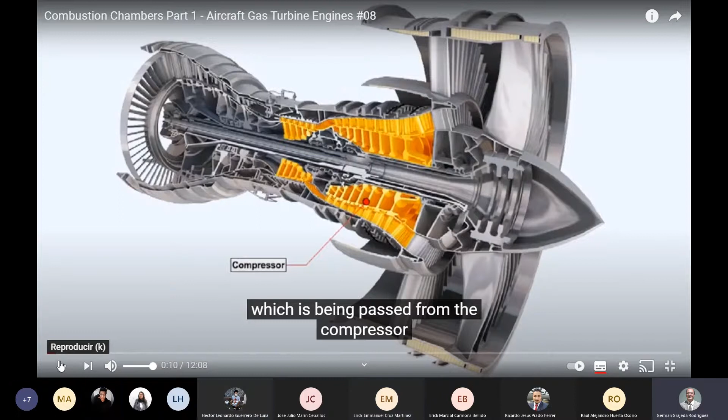And fuel from the fuel spray nozzles in order to generate the maximum heat release at a substantially constant pressure, so that the turbine receives a uniformly expanded, heated, and accelerated stream of gas. This is not an easy task, but advancements are constantly being made in combustion chamber design to enable more efficient use of fuel with less and less pollution of the atmosphere.

Efficient combustion has been made increasingly more important because of the rise in the cost of the fuel, and also the increasing awareness of the aviation industry and the general public of the dangers of atmospheric pollution from the exhaust smoke.

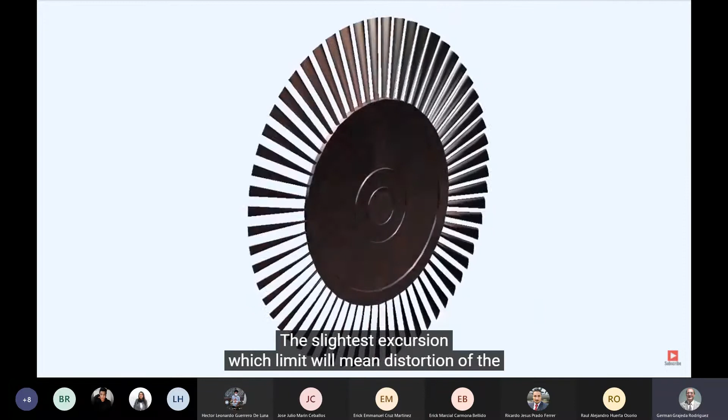There is a limit to the maximum temperature of the gas exiting from the combustion chamber. This is imposed by the materials from which the nozzle guide vanes and the turbine blades are manufactured. The slightest excursion above that temperature limit will mean distortion of the turbine blades and the possible disintegration of the turbine, with probably catastrophic results.

Modern turbine and nozzle guide vane materials will allow a gas temperature not exceeding 1,700 degrees Celsius when it exits the combustion chamber.

Considering that the air which leaves the high-pressure compressor may already have been heated to around 550 degrees Celsius during its compression, we can add sufficient fuel to raise the temperature of the gas exiting the combustion chamber by a further 1,150 degrees Celsius before we exceed the limit temperature of 1,700 degrees Celsius.

It must also be remembered that the combustion chamber has to be capable of maintaining stable and efficient combustion over a wide range of engine operating conditions.

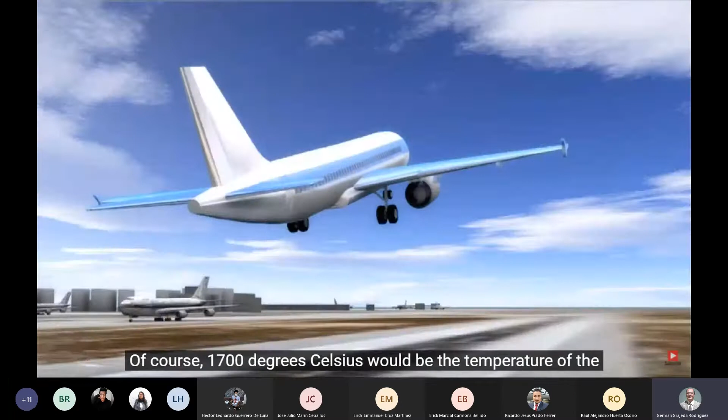Of course, 1,700 degrees Celsius would be the temperature of the gas exiting the chamber with full power selected. Lower power settings would require lower fuel flows and consequently would generate lower gas temperatures.

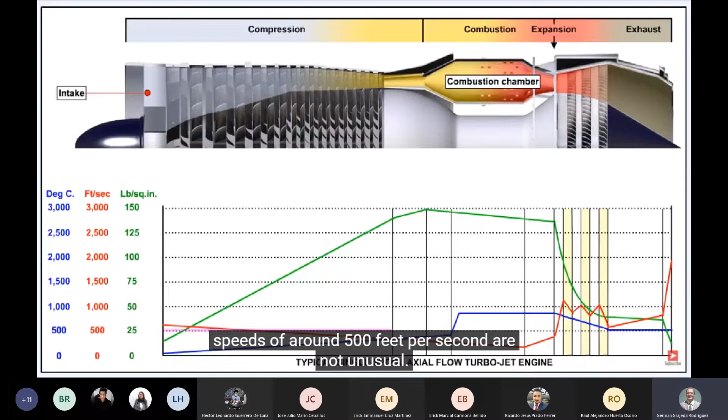You'll see from this graph that the air enters the combustion chamber at a slightly slower rate than which it enters the intake of the engine. Speeds of around 500 feet per second are not unusual.

The flame rate of kerosene, that is, the speed at which the leading edge of a flame would travel through kerosene vapor, is approximately 30 feet per second. If burning kerosene was exposed to an airstream which was traveling at 500 feet per second, it would be extinguished immediately.

So, something must be done to slow down the speed of the airflow after it leaves the compressor and before it reaches the combustion chamber. Otherwise, the flame would not be sustainable.

At this position on the graph, we see how this reduction in the velocity of the air is achieved. The air is slowed down, and, an added bonus, its pressure is increased after it leaves the compressor.

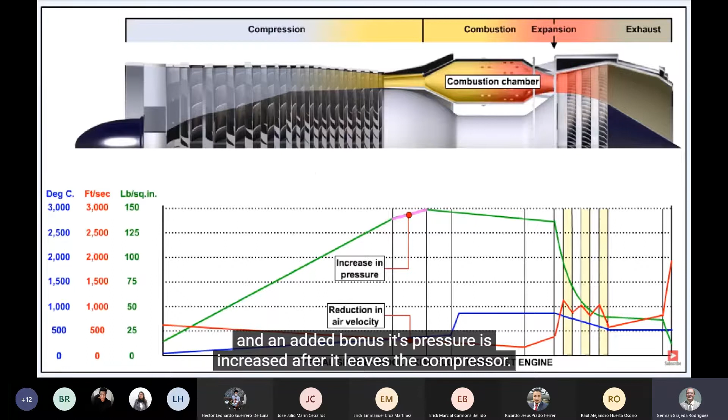By passing it through a divergent duct immediately before it enters the combustion chamber. In fact, the pressure attained at this point, at the end of this divergent duct, just before the air goes into the combustion chamber, is the highest in the whole of the engine.

The reduction in velocity is still not enough, however. Further decreases must be achieved if the flame is not to blow out.

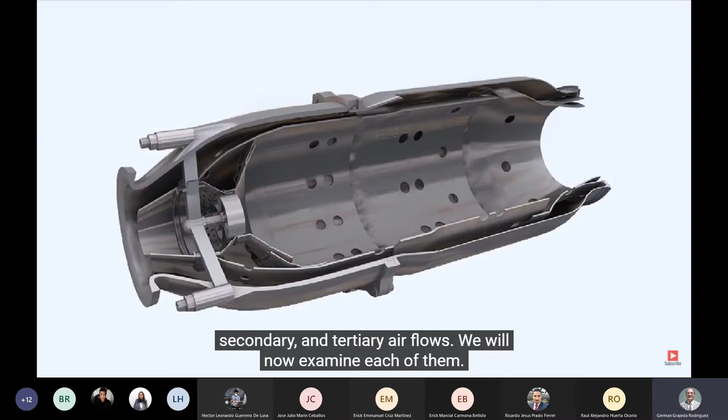The air is divided after it exits the high-pressure compressor into primary, secondary, and tertiary airflows. We'll now examine each of them.

This diagram shows how the air entering the flame tube passes through the snout before being divided to go through the perforated flare and the swirl vanes and into the primary zone.

The primary zone is a region of lower velocity recirculation, positioned immediately downstream of the fuel spray nozzle. It's within this zone that stable combustion is achieved.

The primary air is approximately 20% of the total airflow coming from the high-pressure compressor and into the combustion chamber. This is the air which is mixed, in a ratio of approximately 15:1 by weight, with the fuel and burnt.

By being passed through the flare and the swirl vanes, the velocity of the primary air is reduced, which must happen if the flame is not to be extinguished, and the shape and position of the flare and swirl vanes also starts the air recirculating within the region.

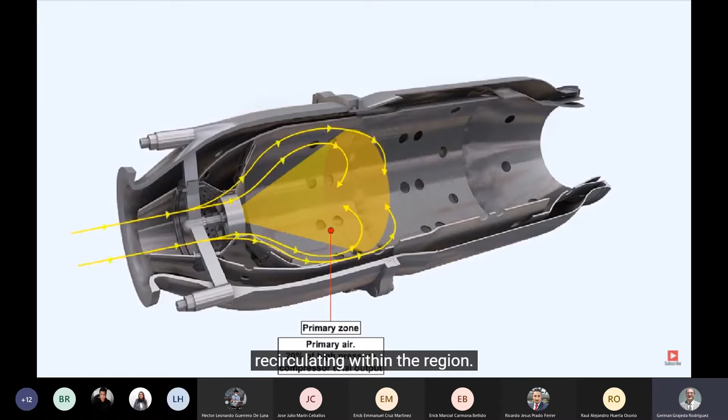The remaining 80% of the output of the high-pressure compressor, air which has not been directed through the snout, goes into the space between the flame tube and the air casing.

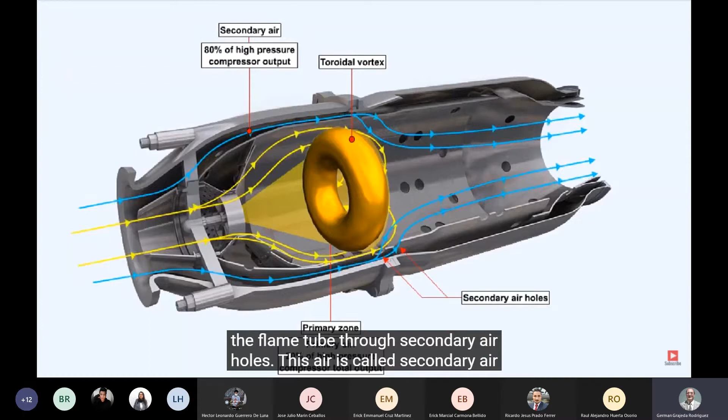Some of this remaining air, approximately another 20% of the output of the high-pressure compressor, is allowed into the flame tube through secondary air holes. This air is called secondary air, and it reacts with the primary air, which is flowing through the swirl vanes to form a toroidal vortex. The toroidal vortex stabilizes and anchors the flame and prevents it being moved through the flame tube away from the fuel nozzle area.

The temperature of the gases at the center of the primary zone reaches about 2000 degrees Celsius. This is far too hot for the materials of the nozzle guide vanes and turbine blades, so a further drop in temperature is required before the gases can be allowed to exit the combustion chamber.

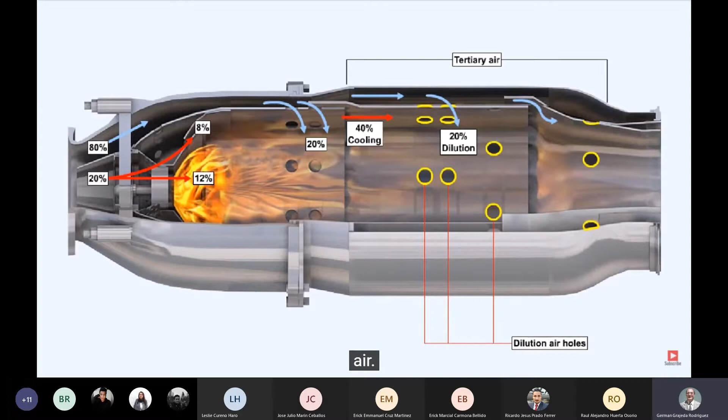The remaining 60% of the total air coming out of the high-pressure compressor is progressively introduced into the flame tube through corrugated joints and dilution air holes in the flame tube. This air is called tertiary air. Tertiary air is used to cool both the air casing and the gas exiting the chamber.

The type of combustion chamber which we have used to illustrate the interaction of the flame and the cooling air is representative of those which would have been used in an early multiple combustion chamber system.

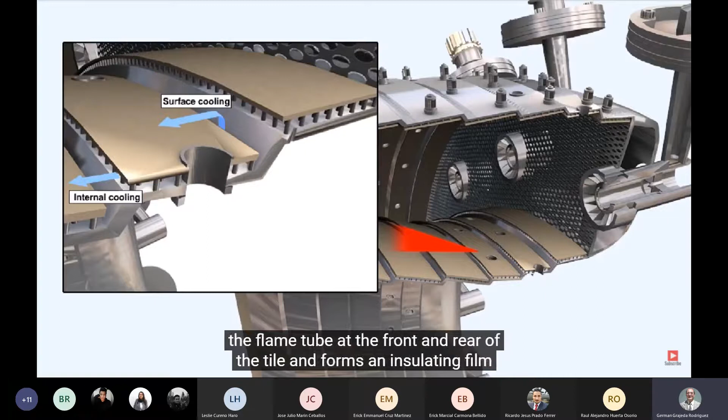Different methods of keeping the combustion chambers from overheating are used. Some flame tubes have ceramic-coated tiles fixed to a skin on their interior walls. Cooling air passes through the holes in the skin and flows between the skin and the tile, which has a ridged surface. The ridged surface improves the heat transfer between the tile and the air. The air finally enters the flame tube at the front and rear of the tile and forms an insulating film for the tile as it flows over it.

Other engine designs use a different method of cooling the air casing, called transpiration cooling, where a film of air flows between laminations, which form the flame tube wall, and then exits the laminations to form an insulating film of air within the flame tube.

This picture illustrates several other features of the type of combustion chamber which would be used in a multiple combustion chamber system.

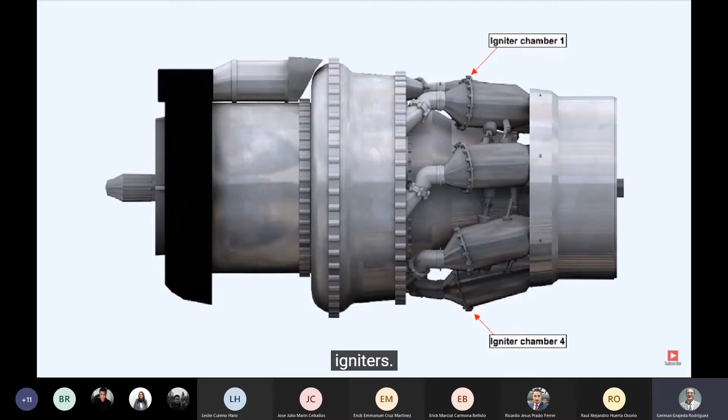Although the engine would probably start quite readily with only one igniter operating, most gas turbine engines have two igniters. However, because there are only two igniters, another means of passing the starting flame between the combustion chambers in this type of system has to be found. This is called the interconnector.

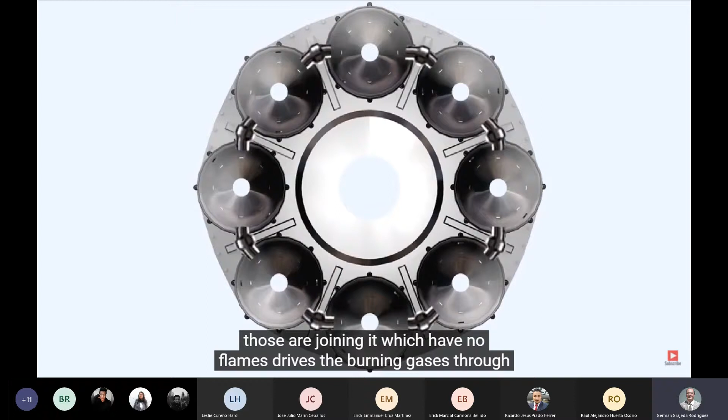Immediately after light-up, the flame in the combustion chambers which have the igniters causes an increase in the pressure within those chambers. The pressure differential between a chamber which has a flame in it and those adjoining it which have no flames drives the burning gases through the interconnector pipework. When the burning gases come into contact with any unlit mixture in the adjacent combustion chamber, they ignite that mixture. This process is continued around the engine until the contents of all of the chambers is burning, whereupon the pressures within them are equalized and the flow through the interconnectors ceases.

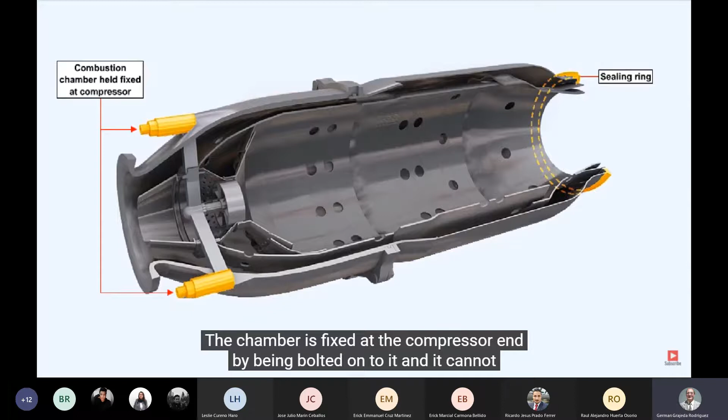The sealing ring at the turbine end of the combustion chamber allows for elongation of the chamber due to expansion. The chamber is fixed at the compressor end by being bolted onto it, and it cannot expand in that direction. The sealing ring allows the chamber to expand into the nozzle box, which is the portion of the engine immediately preceding the nozzle guide vanes, while maintaining a gas-tight seal between the chamber and the atmosphere.

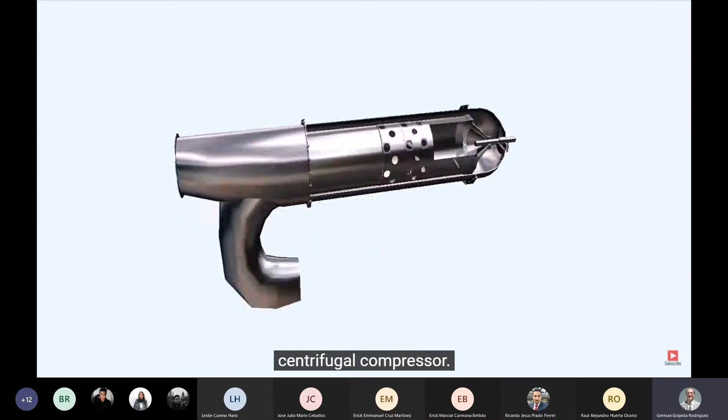The straight-through flow multiple combustion chamber system was developed from Sir Frank Whittle's original design, which was supplied with air by a centrifugal compressor. The straight-through combustion chamber system was later used on some earlier types of axial flow engines, and is still in use on centrifugal compressor engines such as the Rolls-Royce Dart.

The multiple combustion chamber system consisted of a number of individual combustion chambers, which are shown here. Each combustion chamber consists of a flame tube, which has its own air casing. The combustion chambers are disposed around the engine just to the rear of the compressor section.

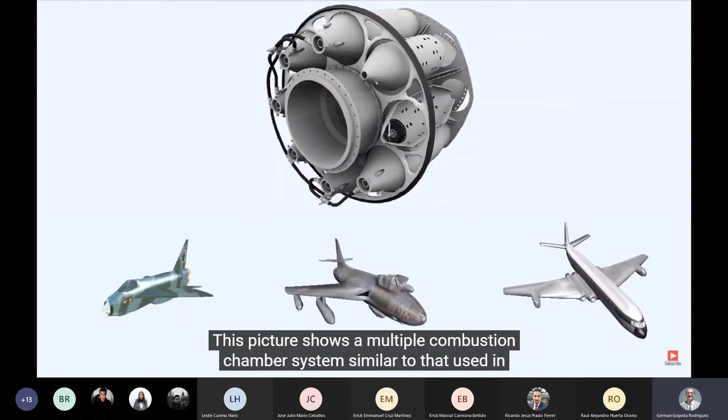This picture shows a multiple combustion chamber system similar to that used in the Rolls-Royce Avon, which was a powerful, for its time, axial flow compressor engine used on many different types of aircraft, both military and commercial, fighter and transport, for a considerable number of years.

Shown here are the snout, the primary air scoop, the interconnectors, and the drain tubes.

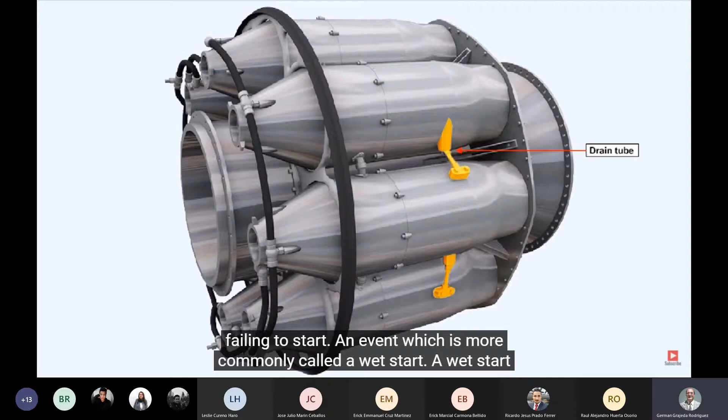The drain tubes allow the drainage of excess fuel from the combustion chambers in the unlikely event of the engine failing to start, an event which is more commonly called a wet start. A wet start happens when the mixture of air and fuel in the combustion chamber fails to ignite during a start.

A considerable amount of fuel will have been fed into the combustion chamber during the attempt to start. If that fuel is not removed before the next attempt to start, and if that attempt is successful, the result will be a combination of excessively high gas temperatures in the turbine region and torching, which is the name for a very long, very hot, and very dangerous jet of flame issuing from the rear of the engine.

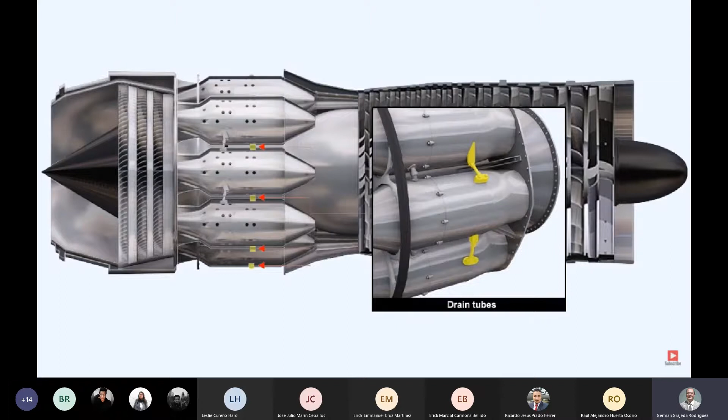The fuel drain system utilizes the drain tubes which connect the lowest part of each chamber with the next chamber below it. Fuel remaining after a wet start will attempt to find its own level by flowing from the top of the engine to the bottom chamber. Once in the bottom chamber, the excess fuel exits the engine.

Any remaining traces of fuel within the engine must be evaporated. To this end, the engine must be motored over on what is termed a blowout cycle. During a blowout cycle, the engine is turned over by using the starter motor. It's rotated for the time normally allocated to a full start cycle, but with the high-pressure fuel cock shut and the ignition system deselected.

Air from the compressor will flow through the combustion chambers, the turbine, and the exhaust system, and assist in the evaporation of any fuel still remaining within.

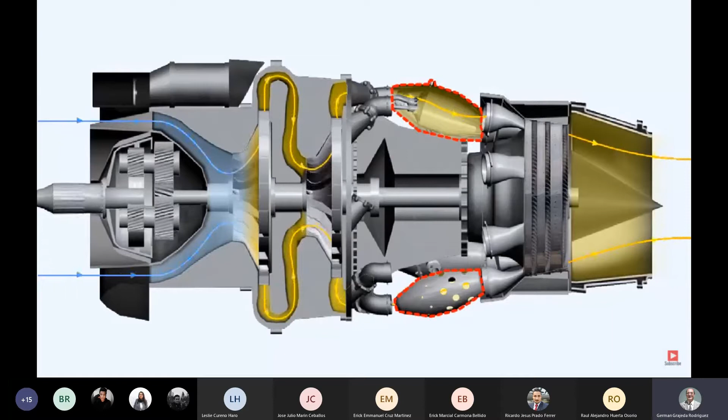The tubo-annular combustion chamber system, shown here, is sometimes also called the cannular or can-annular system. The tubo-annular combustion chamber system differs from the multiple combustion chamber system insofar as it does not have individual air casings for each of the flame tubes. A number of flame tubes are fitted within an inner and an outer air casing, which makes this system a more compact unit. Es el tipo can-annular. Notice the position of the igniter plug.

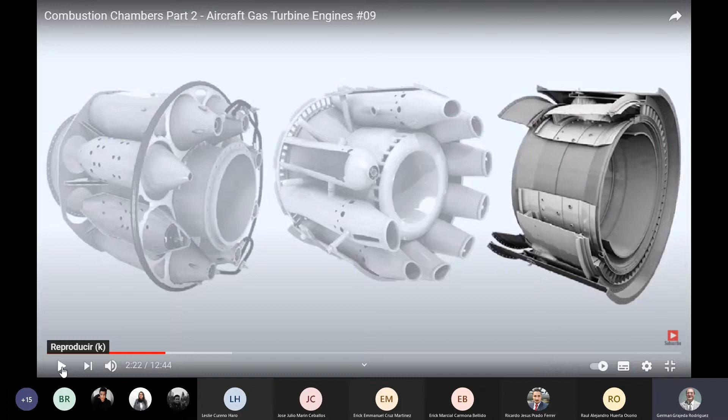For the same power output, the length of the annular chamber is only 75% that of a tubo-annular system of the same diameter. There are no flame propagation problems. Compared to a tubo-annular system, the air casing area is less. Consequently, less cooling air is required.

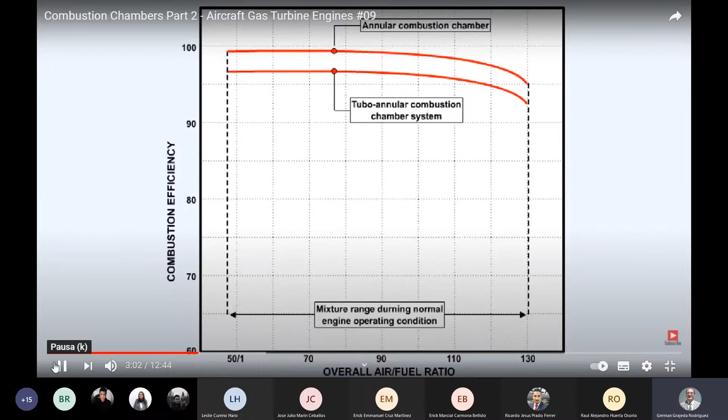The combustion efficiency is raised to the point where unburnt fuel is virtually eliminated, allowing the oxidization of carbon monoxide to non-toxic carbon dioxide. There is a much better pressure distribution of the gases impinging on the turbine, so it has a more even load placed upon it.

We stated at the beginning of this lesson that we had to obtain the maximum heat release from burning the mixture of fuel and air in the combustion chambers. To do this, we must use the chemically correct air-fuel ratio of 15:1. Whereas in the piston engine the use of the chemically correct air-fuel ratio of 15:1 would cause detonation and dissociation to occur, in the gas turbine engine it poses no such problem, because there are no peaks of pressure to assist in their generation.

The fuel and air are therefore mixed and burnt in the primary zone of the combustion chamber in the ratio of approximately 15 units of air to 1 unit of fuel by weight. The addition of secondary and tertiary air will, however, dilute the mixture to the extent that the overall ratio may vary from between 50:1 to as weak as 130:1.

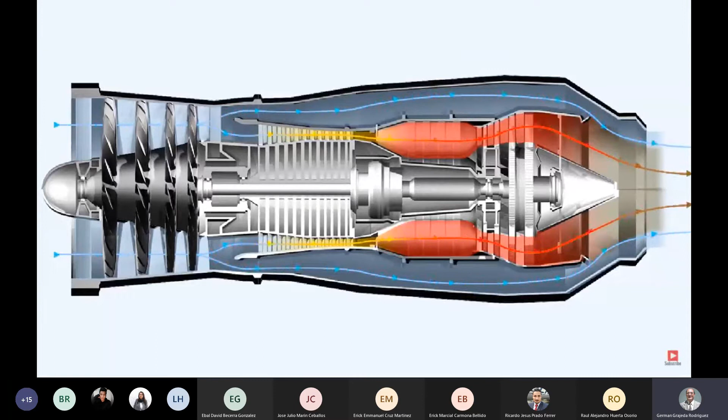There may, however, be certain engine operating conditions which do require the use of the ignition system. For instance, just such a condition would occur following a flameout, which is extinction of the flame due to various unusual occurrences, such as the ingestion of large quantities of water thrown up from the nose wheels into the engine intakes during takeoff from a heavily contaminated runway.

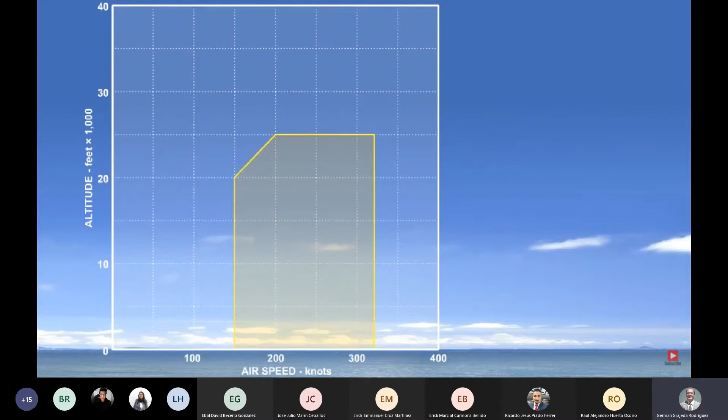The airflow through the engine will cause it to rotate or windmill, so the compressor is supplying sufficient air to support combustion. All that is then required is the opening of the high-pressure fuel cock to deliver a fuel supply and operation of the ignition system to add the final ingredient, a spark. Operation of the ignition system to supply the spark is achieved by selection of the relight switch. The electrical power to the relight ignition circuit functions independently from that which feeds the normal start circuit.

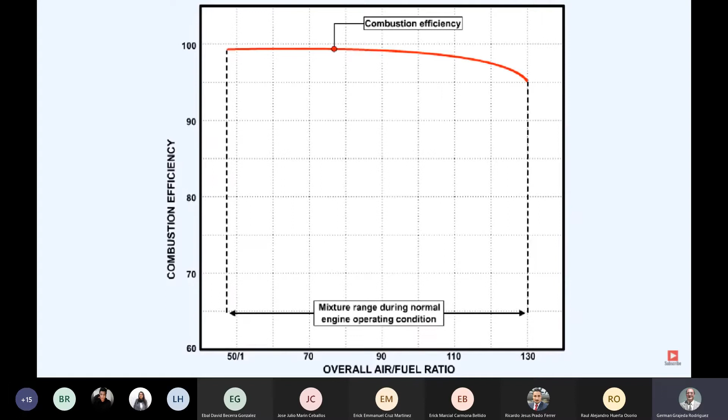Combustion efficiency is the efficiency with which the combustor assembly extracts the potential heat actually contained in the fuel. This graph shows the combustion efficiency of a modern gas turbine engine across the range of air-fuel ratios which occur during normal operating conditions. Modern gas turbine engines have a very efficient combustion cycle. At high power operating conditions, combustion efficiencies as great as 99% are achievable. And at idle, the systems will still give as much as 95%.

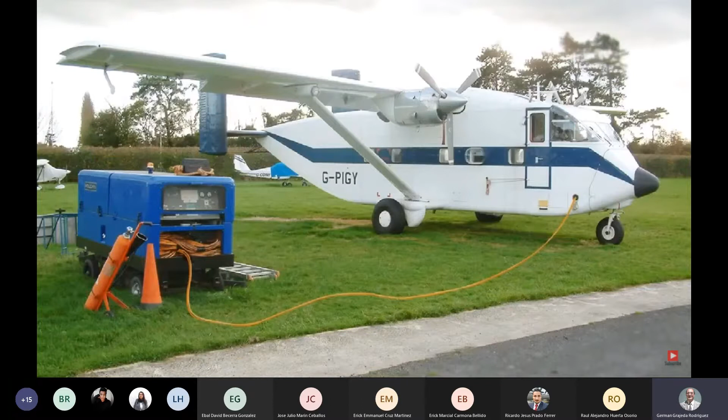The very high combustion efficiency attained in modern gas turbine engines is due in no small part to the fuel spray nozzles which are used in them. These nozzles have the task of atomizing or vaporizing the fuel to ensure that it is completely burnt. This is no easy undertaking, considering the velocity of the airstream from the compressor and the small distance available within the chamber for combustion to occur. Other difficulties occur as a result of the relatively low pressures attainable by the engine-driven high-pressure fuel pump at engine start. The pumps can be of the plunger type or the gear type.

The pumps are fitted to the high-speed gearbox, which is driven by the high-pressure compressor shaft. The pumps are only rotating at a minimal speed during initial engine start, and are incapable at that speed of providing the high pressures, 1,500 to 2,000 pounds per square inch, required to give a good spray pattern. At engine start, when there is low engine RPM and low fuel pressure, the fuel spray pattern forms what is known as a bubble. This spray pattern is unable to atomize the fuel jet sufficiently for ignition to occur.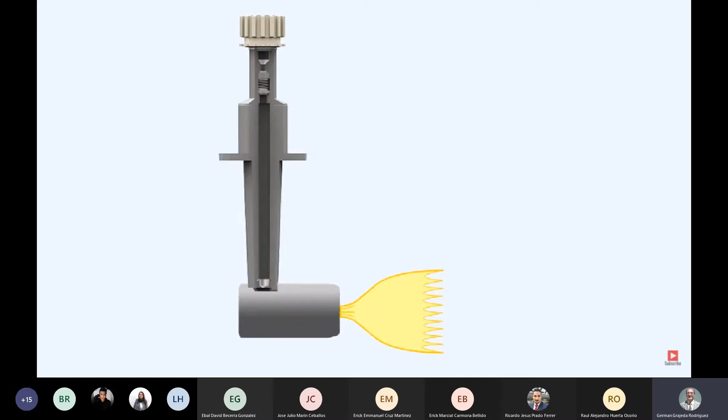As the engine accelerates during the start sequence, the pump rotates faster and builds up more pressure until the spray pattern forms a tulip shape. Atomization is still not sufficient to support combustion. Eventually, the pump produces sufficient pressure to shorten the tulip until it touches the orifice. Only now is the fuel jet atomized sufficiently to ensure rapid burning.

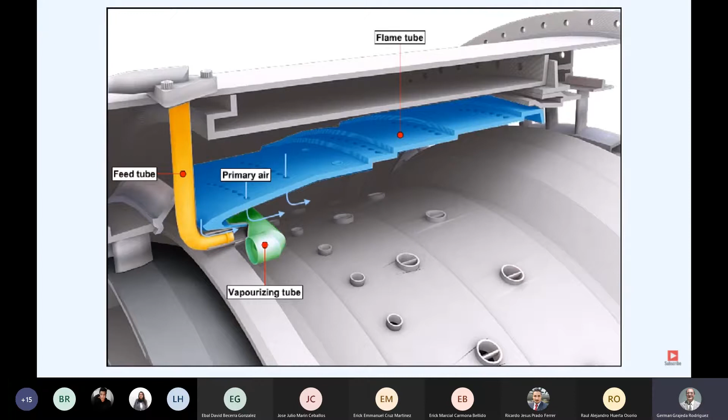The fuel is turned through 180 degrees, and as the vaporizing tubes are heated by combustion, the fuel is vaporized before passing into the flame tube. This concludes the lesson on combustion chambers.

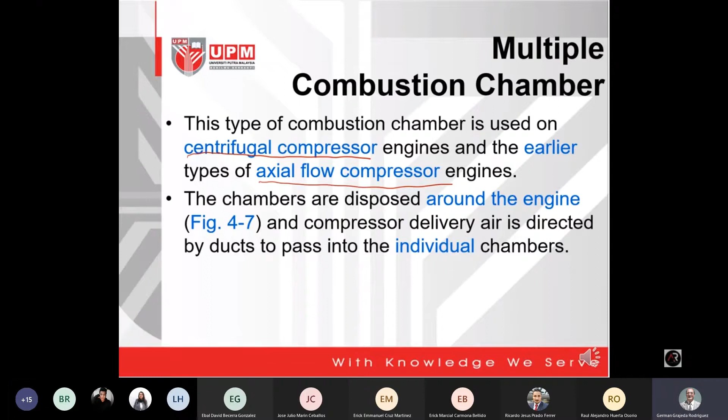Normally it is for centrifugal compressors and earlier types of axial compressor, but it is very difficult to see it in operation anymore. So the chambers are disposed around the engine, which I will show you in figure 4.7 later on, and compressor delivery air is directed by ducts to pass into the individual chambers.

In the multiple combustion chamber, normally the individual cans of combustion chamber are placed around the circumference of the engine, and they are interconnected to each other.

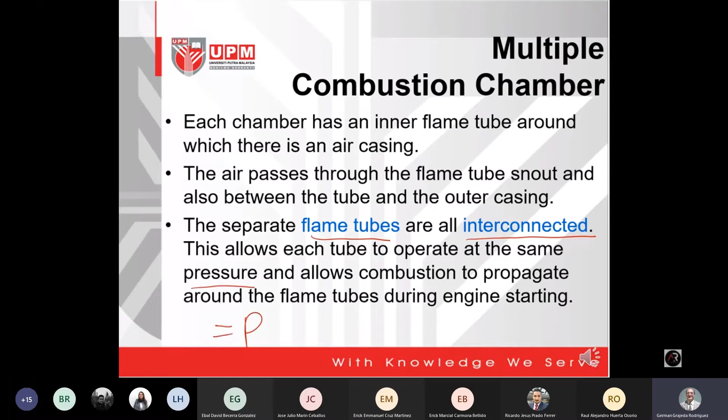So each chamber has an inner flame tube around which there is an air casing. So the air will pass through the flame tube snout and also between the tube and the outer casing. The separate flame tubes are all interconnected. So this allows each tube to operate at the same pressure. So you want the same pressure, and it allows combustion to propagate around the flame tubes during engine starting.

The second type of combustion chamber is the tubo-annular combustion chamber. So this type of combustion chamber bridges the evolution gap between the multiple and the annular types. A number of flame tubes are fitted inside a common air casing. The airflow is similar to that already described in the multiple type combustion chamber, and I will show you in figure 8 what it looks like. So this arrangement combines the ease of overhaul and testing of the multiple system with the compactness of the annular system.

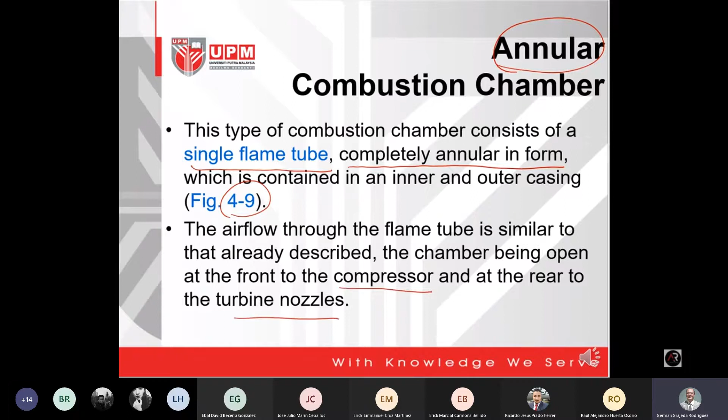Now, the third type of combustion chamber is the annular type. So this type of combustion chamber consists of a single flame tube. There's no longer a separate individual combustion chamber can, and it is arranged in completely annular form, which is contained in an inner and outer casing, as shown in figure 4.9. The airflow through the flame tube is similar to that already described in the previous two combustion chambers, the chamber being open at the front to the compressor and at the rear to the turbine nozzles.

In comparison with the tubo-annular combustion system, the wall area of a comparable annular chamber is much less. Consequently, the amount of cooling air required to prevent the burning of the flame tube wall is also less by approximately 15%. And this reduction in cooling air raises the combustion efficiency. So the efficiency increases to virtually eliminate unburned fuel, resulting in less pollution.

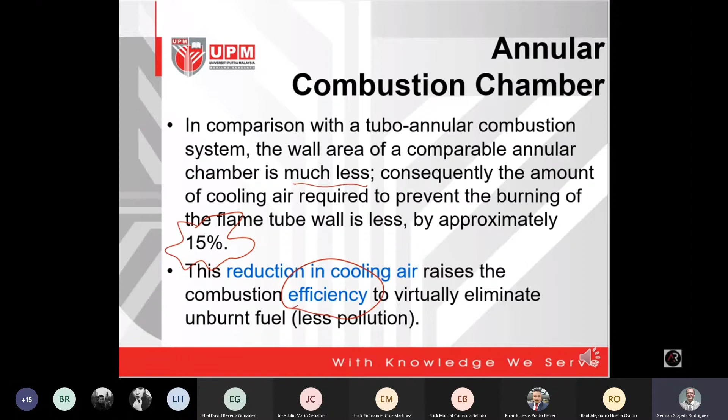The introduction of the air spray type fuel nozzle to this type of combustion chamber also greatly improves the preparation of fuel for combustion by aerating the overrich pockets of fuel vapor close to the spray nozzle. So this will also result in a large reduction in initial carbon formation and eventually increases the efficiency of the engine. And that's all for now with regard to types of combustion chamber. We will now continue to the next topic, which is combustion chamber performance.

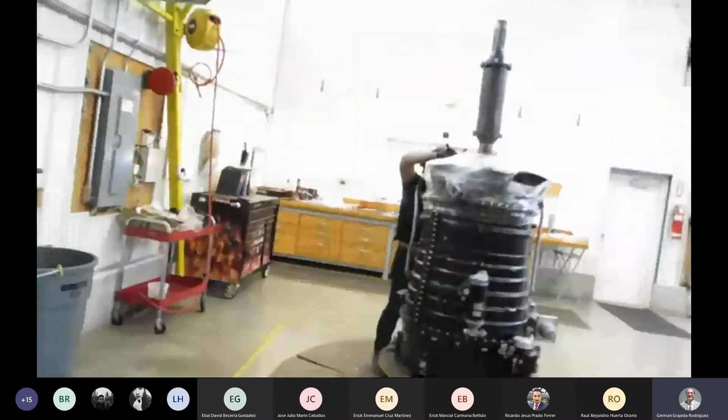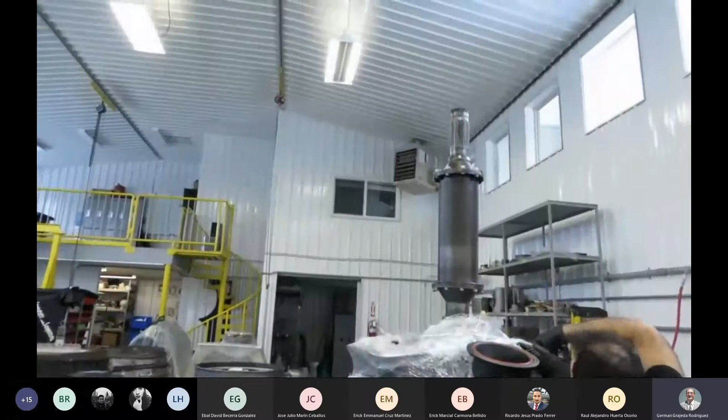Okay, let's get to work. This video is a follow-up, or a part 2, to good news, bad news, or bad news, good news with the T58. We have been salvaging parts from donor engines, and we've got the combustor out of the engine that burnt up, and the candidate for replacement right here. And we're going to take a look at the differences between the two.

First, let's take a look at some of the damage to this combustor. Now, it wasn't really burnt by the heat, so I guess the air jacket survived for a while and was maintained so that this thing wasn't burnt up, but it was on the way out. Let's just show you a couple things here. Can you see that? There we go. There's pieces missing around the sealing edge.

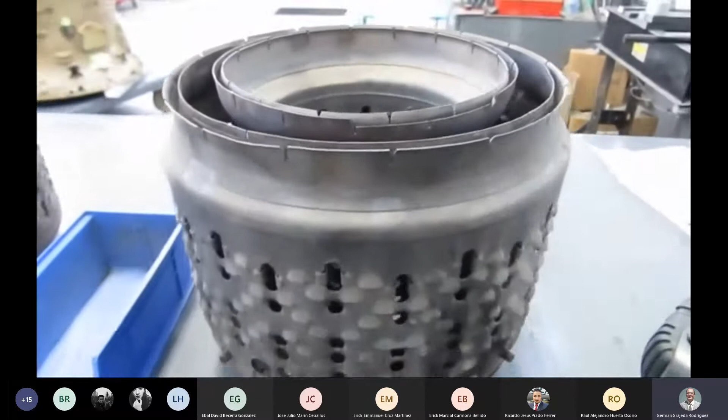That would seal around a flange in the outer gas path, because all the hot gas going to the turbine passes through here. This is the exit of the combustor. And there's also some damage right there. Can you see that? That was from vibration. And these pieces have already gone through the engine and have damaged it, but then the turbine burnt up, so no big deal. Also, it's got some age on it. There's some globby weld repairs there. And we're going to turn this over and compare it to the new one, which is right over here.

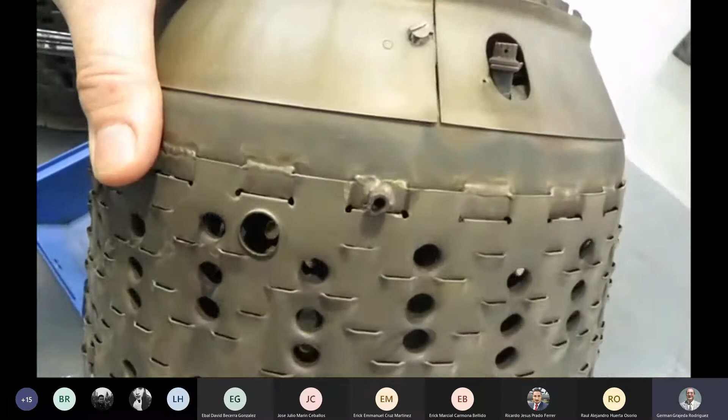Okay, before we take this thing apart, I'm going to show you one more case of wear, which shows that this combustor was really needing to be replaced anyway, even if the engine didn't self-destruct. So there are mounting bosses, or pin bosses. There's one right there. That's where a pin comes in from outside the combustor case, through the case, and holds the liner in place, because these liners essentially float in position to allow for thermal expansion, but it's located by a pin, and you can see that hole is quite worn.

There's 4 of them. There's another one. Doesn't look so good. Very worn from vibration. There's the 3rd one. And the 4th one. Now, when these pins wear through, there's nothing really holding this combustor in place. And these are the fuel lines. They pass through a hole in the outer case. So they would then contact the outer case and wear and fret and eventually fail, which would be bad, to be spraying fuel in an uncontrolled fashion all over the combustor and in it. Okay, we're going to take the cover off.

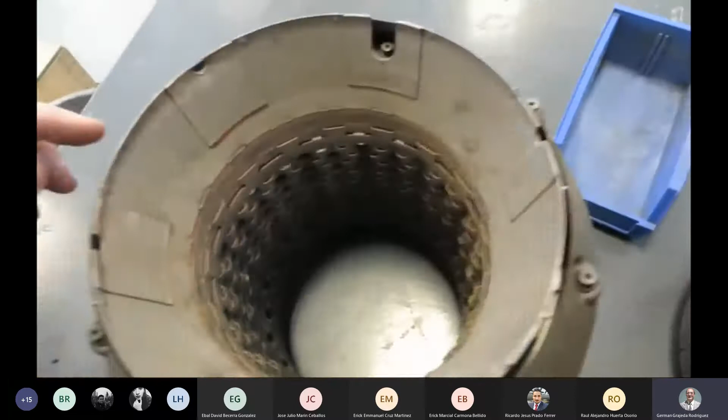Okay, before that, this is the old one. This is the new one. There's a couple differences we can look at, besides the fact that there's no wear. It's in really good shape. Look at the design here. This cover, it's over the fuel manifolds, which we'll look at in a second. It's a 2-piece with a screw on each side, and it's held in with 2 bolts around its circumference. All right. The new one has 1, 2, 3, 4 mounting bolts. It's all one piece, which I like. Less pieces to come apart.

Also, the inner liner, or inner wall of the liner, has these locating slots that go over the struts that come out of the compressor. They're actually in the diffuser case, or the compressor outlet, whatever you want to call it. But they're just saddle-shaped grooves cut in the sheet metal. And on this one, they've got an extra sheet of reinforcing metal there, so it's a double thickness. I like that. It's starting to look like this one is not just in better condition, but it's of a newer, more heavy-duty design. So let's pop the hood on each of these and compare them.

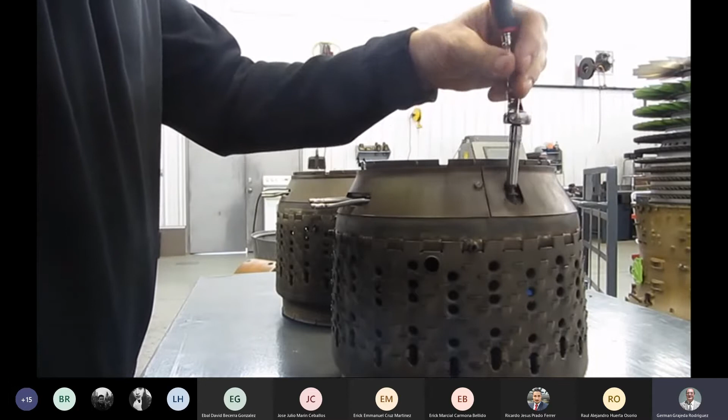Okay, so a little clamp here. Little clamps that hold that on. There's 2 of them in this design. Okay. And then we've got to pull this apart. There we go. Come on. How do I do that? There we go. And they just sort of pop apart. And there's the front half, what I'm calling the front half. It's actually the bottom of the engine. This is on the top. And I've taken this apart before, so there's no lock wire. But let's do the other one as well.

Okay, this one has 4 bolts with no little clamps. They just go straight into a threaded insert. Okay. And this one actually comes off just like that. I like that. It's one piece, nothing to rattle apart. Now let's take a look at both of these from the top.

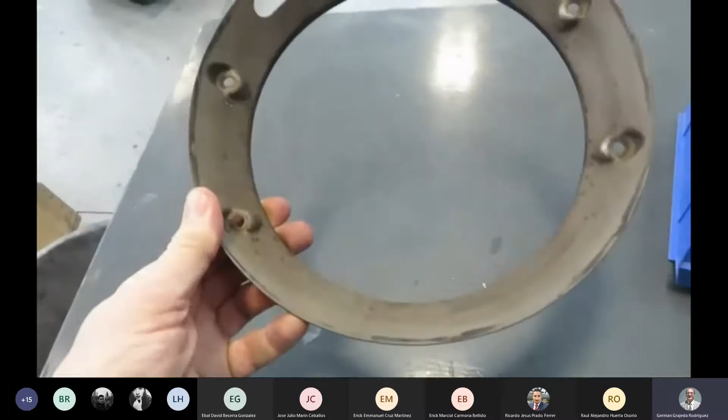Okay, in the combustor that we're going to be replacing, it has a clamp here and a bolt, and there isn't a clamp over there. What holds the fuel manifolds down is this inner sheet metal bulkhead inside the cover. That's all right, I suppose. But on the one we're going to be using to replace it, there's a clamp, and they're quite heavy-duty clamps. The same as over here. They're the same part number. There's one on the inlet of the fuel manifolds. But unlike the other one, this one also has one holding down the other end. So I like that. And inside the cover, well, it's just a cover. I kind of like this design better. Makes me feel better.

Okay, let's take off the clamp that holds the fuel manifold in. We'll take a look at the fuel nozzle. This has already been disassembled and put back together to keep the pieces from getting lost, and the fuel nozzles have already been cleaned. I did that yesterday. We're actually reshooting this video because the footage was all blurry. So these are 8 of the 16 fuel nozzles in a T58, and they're exactly the same as the ones in the newer one.

Each of these lines supplies fuel to 4 nozzles. Did I point out the same ones? I did, so there's an alternation. I think 8 fuel nozzles in total are used for starting, and then once it gets going, all 16 are used.

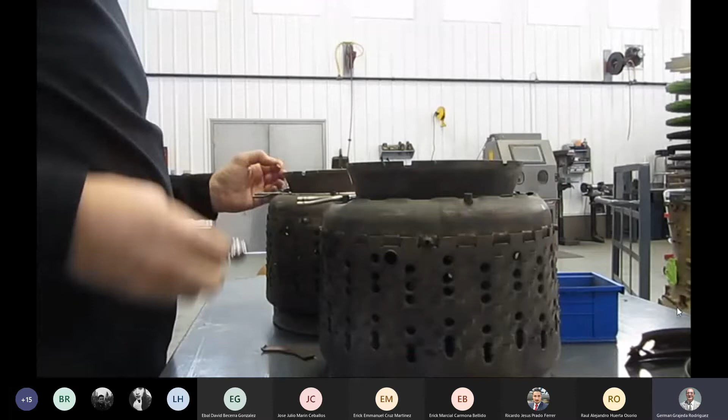Let's take this manifold out. There's one more design difference that I really like in the replacement manifold, the replacement combustor. Let's take a look at that.

Okay, we've got the old one and the new one. I'm going to lift out the fuel rail. Again, these have already been cleaned - they were black and sooty when I took them out yesterday. Set them down very carefully. Let's see if we can get a nice close-up of what these things look like.

Okay, those are the fuel nozzles, and they're the exact same. They inject fuel into this combustor. The air in this combustor is at about 100 psi, so about 8 times more dense than atmospheric air, so a lot of fuel. Each of these combustors burns enough fuel to make about 1,300 horsepower at the power turbine.

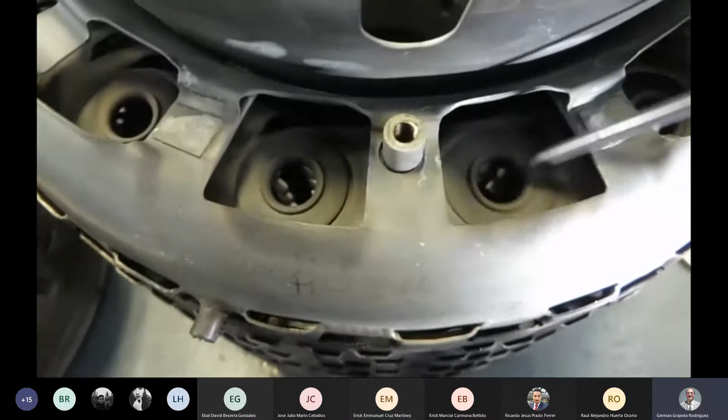Let's take a look at a little difference between the two. In the old one, these are where the fuel nozzles fit. Let's see if I can light it up and move it around for you. They're pressed out of sheet metal, and what they do is seal the fuel nozzle but still allow for some movement without letting air through. Okay, that's what they look like.

And on the new one, they are much heavier duty, much thicker section. I'm trying to get the lighting good here. There we go, let's take a look at that. It's the same idea, but just a big, thick, heavy washer type thing.

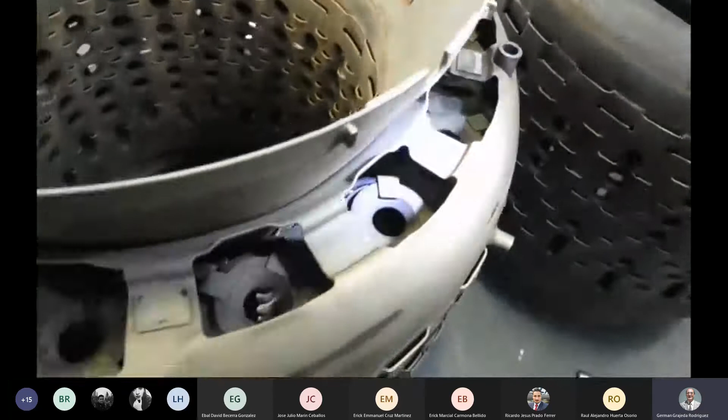Again, more resistance to wear, and just a heavier duty kind of design. And this one has no weld repairs. Quite nice - one more item that makes this one better for our use.

Let's try to find an ignition plug or an igniter hole. It's right there - you see how that's in fairly good condition? Right there, fairly good, really good. And the igniter hole, there's 2 of them. Here's one - can you see how it's in the lower left-hand sort of quadrant? It's quite worn, very paper thin, made a sharp edge.

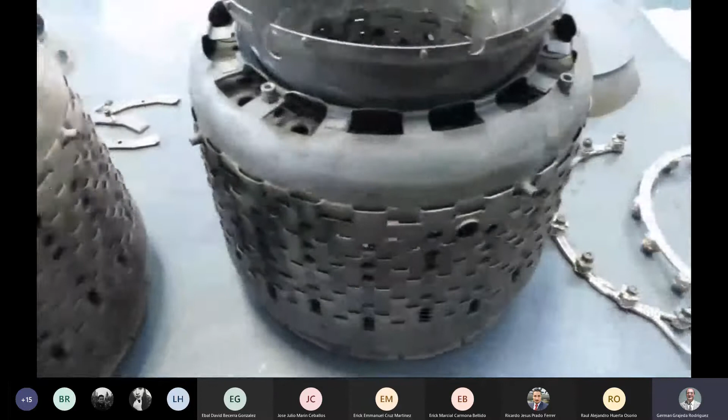So there you go, the design is a little bit heavier duty, I think more secure, and it's also in much better condition. This combustor came out of one of the junkers on the pallet that looked horrible on the outside, and inside all the parts were in great shape. I think our resurrected T58 race boat engine is going to be very happy with this combustor in it.

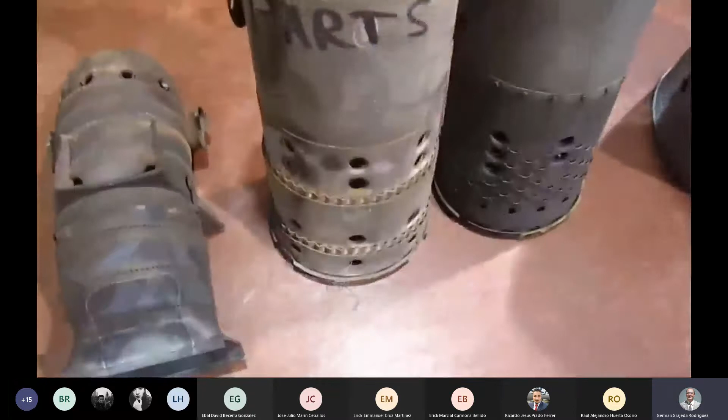Okay, we've got the inner liner from an Orenda Type 14 turbojet, and there we've got the Rolls-Royce Spey - it's a more powerful engine by quite a bit than the Orenda. Then we have the standard or old style can from a J79 right there. We have the new style can from a J79, this is the one used in all the LM1500 ground power units. Right next to it, we have our recently acquired J75 combustor.

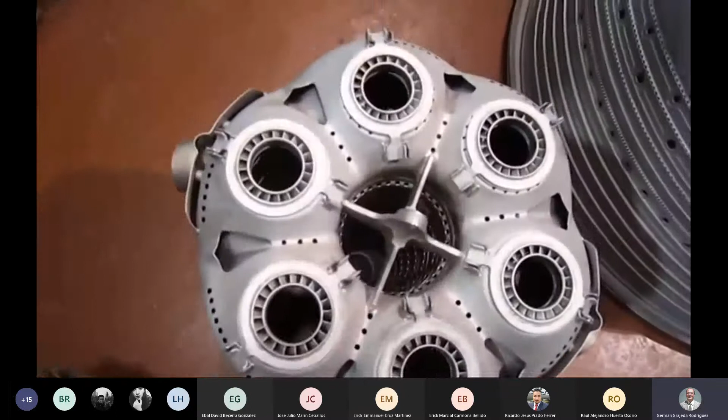And shop kitty. Our J75 inner combustor liner with the 6 fuel nozzle holes - very interesting piece.

Shop Kitty is showing us the LM2500 inner combustor liner. This is an annular design with 30 fuel nozzles.

Okay, Shop Kitty wants us to see the annular combustor liner out of a JFS 100 jet fuel starter. Very similar, it's an annular design, a lot smaller, a lot cheaper. You like that one, don't you?

Right next to the new style can for the LM1500, we have a can from the Rolls-Royce Avon. It's a bit older, and it uses 8 combustors per engine rather than 10, so it's a bit larger. That's the overall view of the outside.

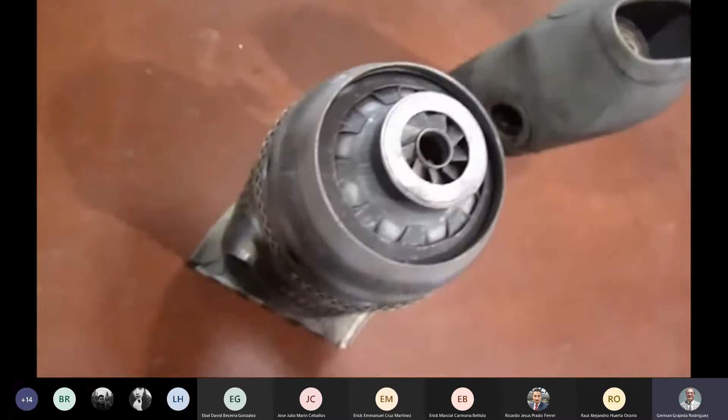Rolls-Royce Avon. Now, combustor liner design is a black art, and what I mean by that is, if you take all the equations and relationships of fluid dynamics, aerodynamics, thermodynamics, characteristics of fuel, fuel nozzle flow patterns, and what you want to do to burn your fuel and make heat without burning up your engine, and punch them into a supercomputer, you'll get a rough idea of what you want, but no specific design. It's very much trial and error.

And so what happens is, with all those efforts and engineering teams working, all companies' combustor designs start to look kind of the same. We're going to take a look inside some combustor liners from different companies, different engines, and I'll show you what I mean.

Okay, this is a J79 single fuel nozzle combustor, also used in the LM1500. It's a bit black because it's been burning jet fuel, but it's got the mixing air holes, small ones up there. It's got a low velocity zone near the fuel nozzle, some large holes, small ones, and then the larger mixing holes. These larger mixing holes are for mixing with the exhaust gases once the fuel is completely burnt. Up there's mixing air holes for helping to burn the fuel.

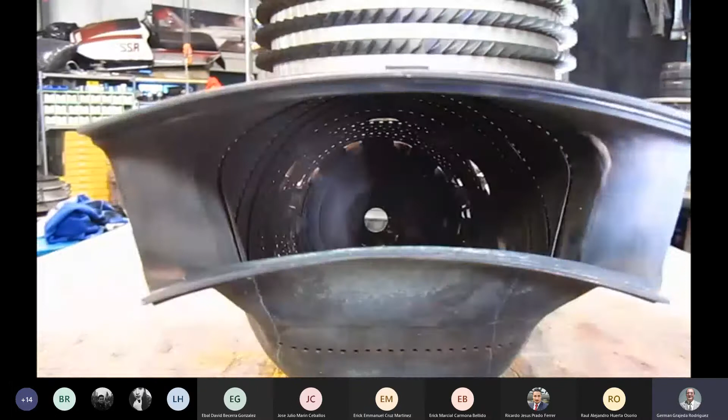Okay, J79. Now here's the liner from a Rolls-Royce Spey. It has the transition duct attached, which is what makes the gases take on the annular shape for the turbine. But we can look inside and you can see it looks an awful lot like the 1500 or J79 design. It's got the fuel nozzle hole with swirler vanes, larger holes with little short ducts attached up top, and then progressive rings of mixing air holes to dilute the hot air to a temperature the turbine can handle. That's the Rolls-Royce Spey.

Okay, here's the Orenda Type 14 turbojet, and it also has the transition duct attached. We can look inside, let's get the flashlight here. There's your fuel nozzle hole, your area of low velocity where the burning takes place, and then progressive rings of larger and larger mixing air holes. This engine works at quite a low compression ratio, so it's a very large combustor liner. Looks familiar? That's the Orenda Type 14.

And here's a look inside the combustor can from a Rolls-Royce Avon. It does not have the transition duct attached. You can see there's the fuel nozzle hole with swirler vanes, the cap with the low velocity area for burning of the fuel, and then the rings of progressive bleed air holes for mixing of the hot combustion products with cooling air for introduction to the turbine.

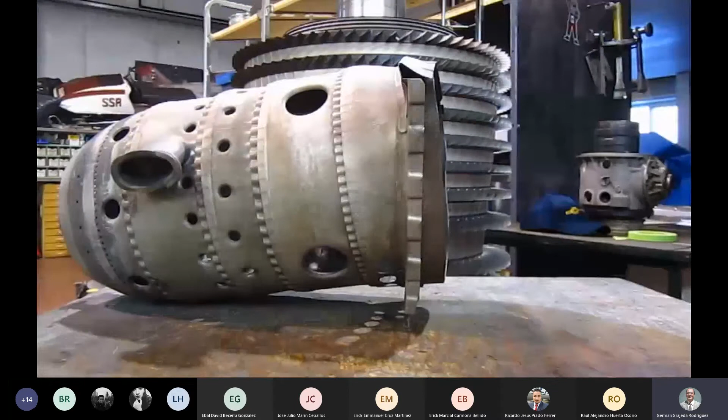Okay, there's the Avon without the transition duct or the discharge nozzle, and it fits in the engine right like that. It doesn't actually stick together, the engine holds it together, and it produces the output area like that. Look familiar?

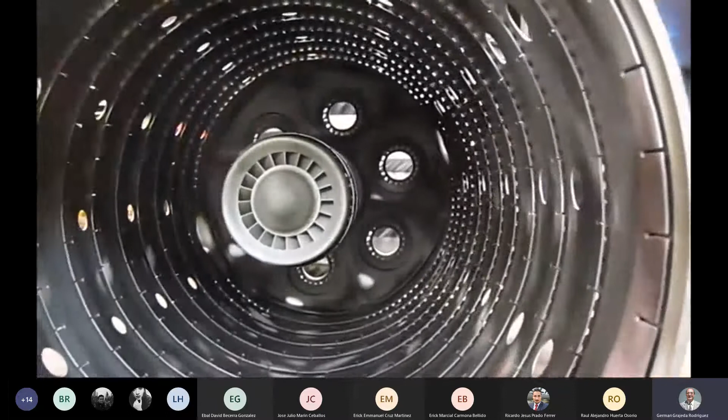Let's take a look inside the combustor liner from a J75 Pratt & Whitney. Look at that, is that cool or what? There's the mixing air holes, the fuel nozzle holes with the swirler vanes around them.

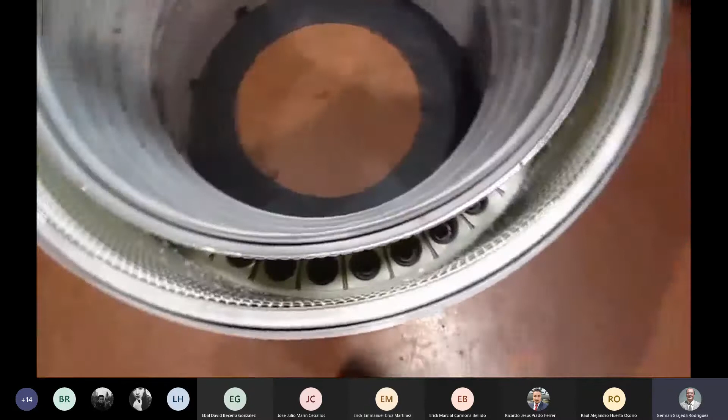Okay, and last but certainly not least, take a look at that. We've got the fuel nozzle holes with the little swirlers around them, and the progressive rings of mixing air holes, with the discharge in an annular shape, perfect for introducing the hot gases to the turbine.

Can't really get this thing up on the table because it's heavy and it's expensive. The entire inner surface is covered with a ceramic thermal barrier, and that's a fuel nozzle hole. There are 30 fuel nozzles, holes for atomizing. Notice how many of them have an igniter hole.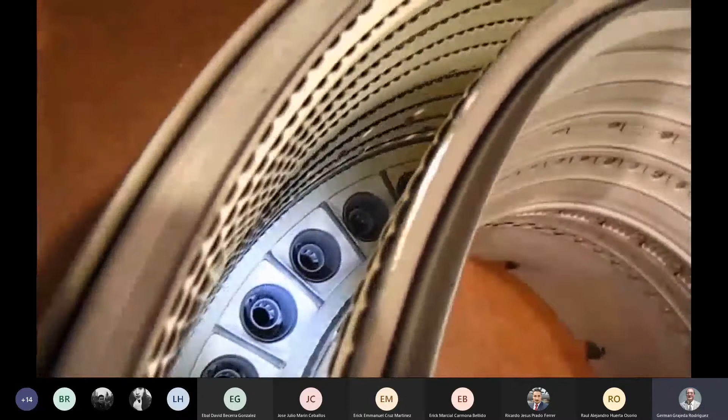Let's see if we can find one. Oh, there's one. And there's one. This is a much more efficient design for more uniform burning of the fuel. This is an annular combustor, the type of combustor used in all modern large airliner engines.

So there's a lot of advantages to an annular combustor: better fuel economy, lower emissions, greater power, less stress on the turbine because it's a more even ring of heat going into it. But there's a couple disadvantages—the engine has to be removed and basically taken apart to replace or repair this liner, and it's expensive.

Did I mention that this is worth $500,000? Yeah.